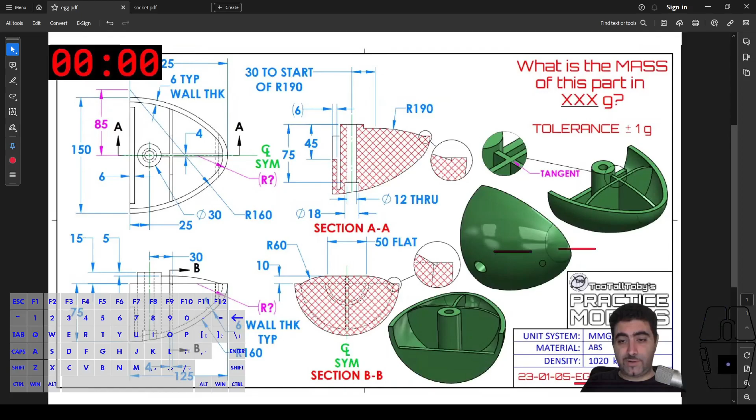And if you look closely, you will see that this rendering of a window or whatever that is doesn't distort over that edge line. Now that instinctively tells me that these two arcs should be tangent, right? Although this is not mentioned anywhere in the drawing, at least the way I see it's not. So let's see how we can approach that.

Okay, so we'll fire up Alibre. We will make a new part. We'll call it egg because we can. And let's start designing. So let me show you first how I will start.

I will start with this view here, which is a 75 line here and a 125 line here. And then I need to make this first arc. Now this first arc, we've got its radius, it's right here. It's 160 millimeters. The second one, we don't have its radius, but we know a couple of things.

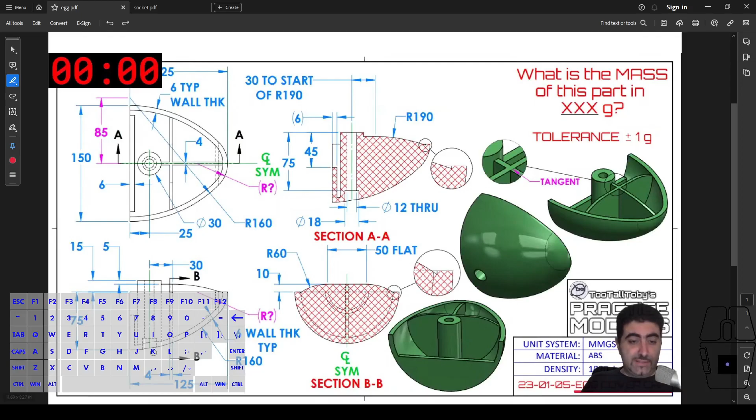We know that it's tangent to the first one, and we know the center of that arc is exactly on that line, right? So that'll help. But in order to fully define this arc as well, we also need the center of this arc. Well, if you look really closely here, it seems that this arc ends perpendicularly to the front face.

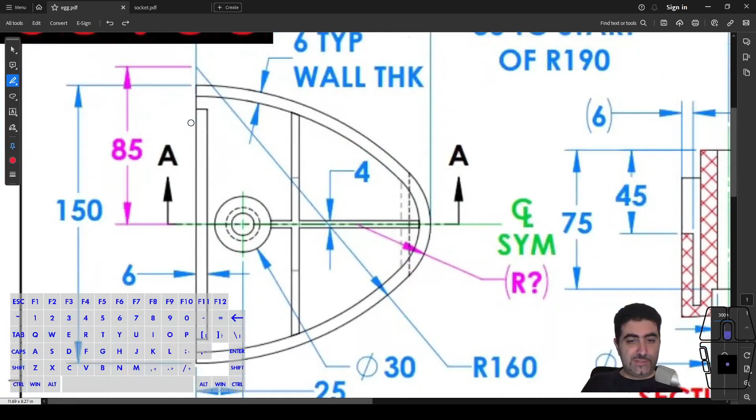And indeed, if you also check this one out, you will see that we get confirmation that the center of this arc is indeed on the plane of that front face, right? And you can also see that the egg portion of it, without the pillar and the ribs, is a revolved feature, revolved and shelled.

How can you tell it's shelled? Well, we get a 6 millimeter typical wall thickness here. That generally means it's shelled. So let's go and apply all of that. We will start the arc. We know that it's 160 millimeters. Okay, there's the center of the arc.

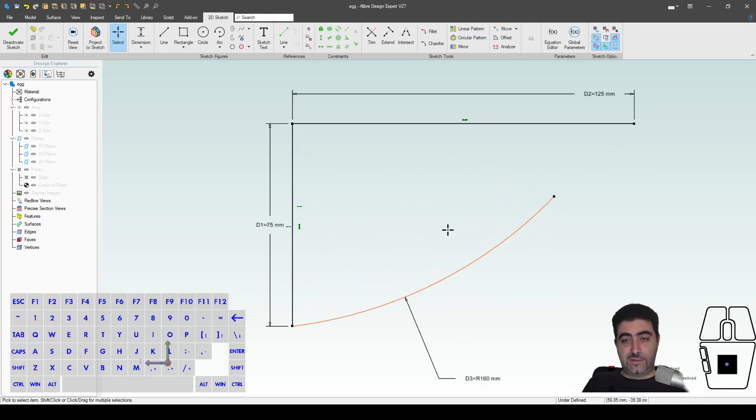We can either constrain it with a coincidence constraint to be on that line so that it ends up being on the front face, or, you know, I might have been designing like this and I couldn't see that center. So in Alibre, you can make an arc perpendicular to a line. And what that does is exactly the same thing. It puts the center of the arc on that line.

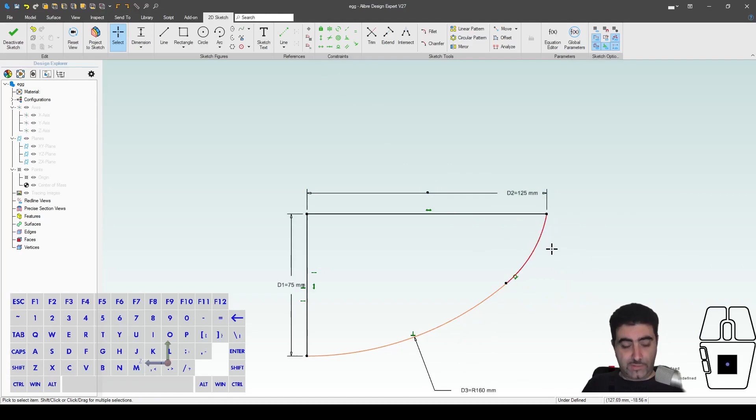So we've done that. Now let's create the tangent arc, put it all the way up there, okay? And we constrain it to be on that top line, and what do you know, this is fully constrained. Okay, now we will hit the space bar and we'll do a revolution. Oh, I get a problem detected.

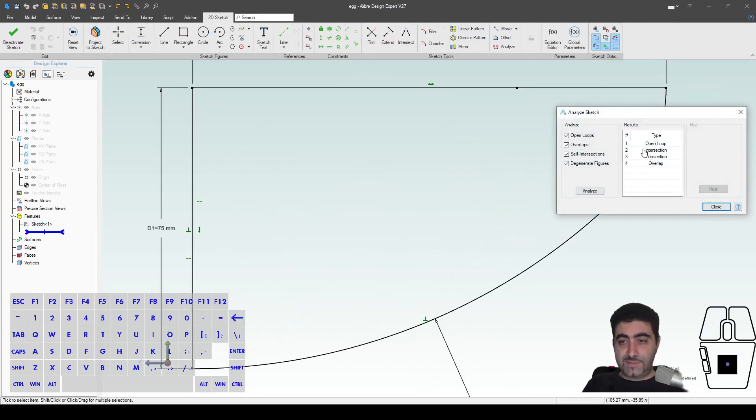What problem do I get? It seems that I might have made this line twice. Yes, I actually did this front line twice somehow. In any case, now I start the revolution, but which axis am I going to use? Well, of course I can use the z-axis, because of the way I drew the sketch.

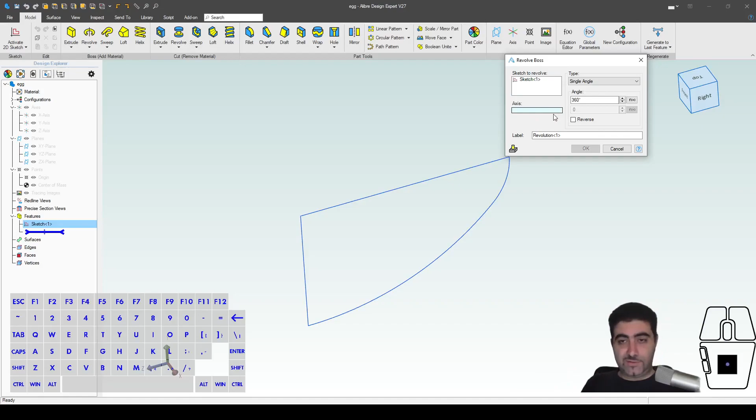But look, I have my sketches toggled on up here. It's this little button, right? So when I have my sketches toggled on in Alibre, I get additional options available to me, which I didn't even know until recently. One of them is I can use one of the lines without any other treatment or preparation as a revolution axis. Okay, so let's say that this is mid-plane 180 degrees, and we have the exact shape that we want.

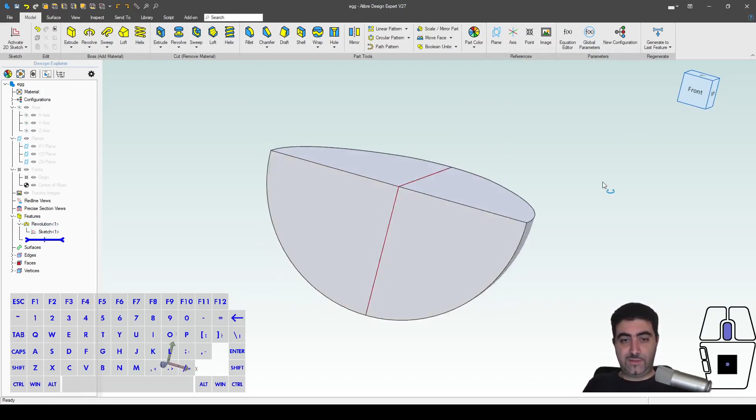Now I'm gonna shell, and the wall thickness is 6 millimeters, and you will notice that I'm also removing this surface here. Okay, now why am I removing this front surface? You will see that in a bit. Okay, so what feature do we design next?

Well, next I will do this pillar here. Why? Well, I have these dimensions here, and they're measured off the top of this pillar, plus the ribs also reference the pillar.

So generally speaking, it's better if you do this first. You can do the math and extract the correct values, but there's no point. If you have direct values annotated here, just use them.

Oh, and how do we create the pillar? Well, it's 15 millimeters over this top plane, and it goes all the way down to this circular bottom. So let's do that thing exactly.

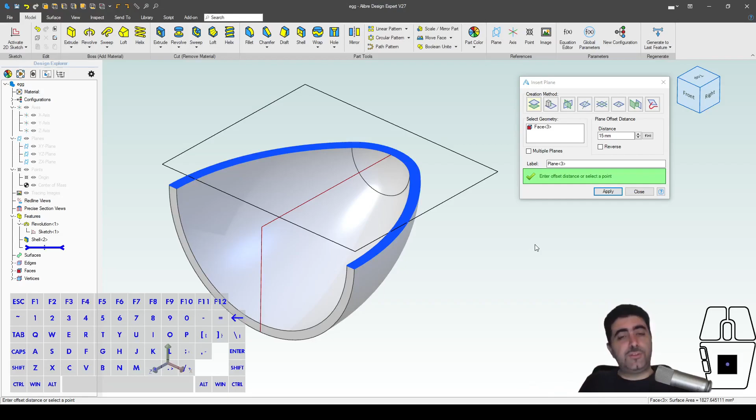Now I will create a reference plane. Top tip: when you're creating reference geometry, do not select the creation method first on your own. Do not do that, because 99% of the time Alibre is automatically going to select the correct one. Only if it doesn't, which is unlikely, should you choose it by yourself. I say never do that. It just costs you a bit of time. If you want to save time, don't do that.

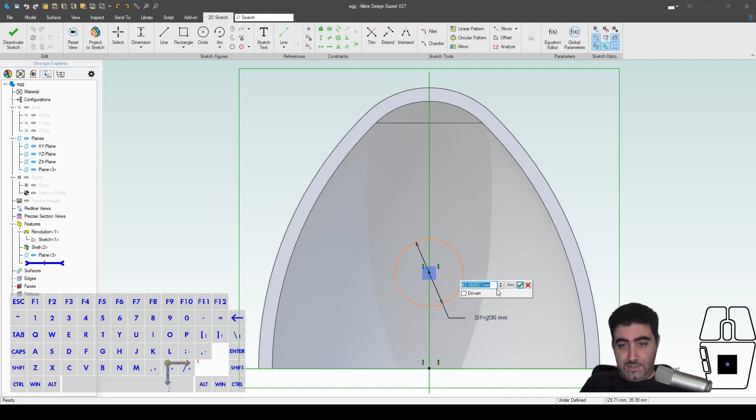By the way, let me show my planes as well. Okay, so this is the one that we just created, and we're going to create this pillar, which is 30 millimeters. It's in the middle, and it's 25 millimeters from this origin. Yep, I know, we need to go the other way.

Extrude up to next surface, give it the correct direction, and we're done. And since I did that, I might as well do that hole that goes through it.

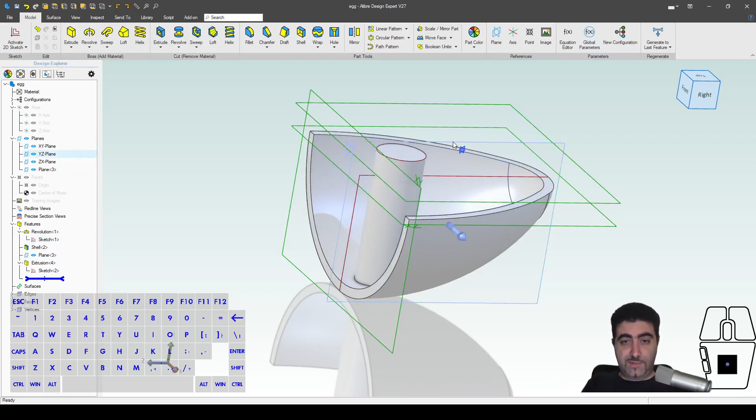So I just project in the top surface, and I pencil in the rough shape. Now, if I desperately wanted to have this fully defined, I would also add this horizontal constraint, which, because this is an arc, makes sure that I'm still cutting well below the bottom surface. In case I didn't make it clear, I'm going for this internal cut right here, which ends up down here.

Yep, so that's how I would do it. Now, the dimensions for this are annotated here. 75 millimeters from the top of this pillar is where this counter bore starts. And the through hole is a diameter of 12, and the counter bore is a diameter of 18.

Okay, let's go apply all of that. So the drawing tells me that this is 75. I need 12 here as a diameter, so 6 is a radius, and 18 as a diameter means that I need 9 millimeters of radius.

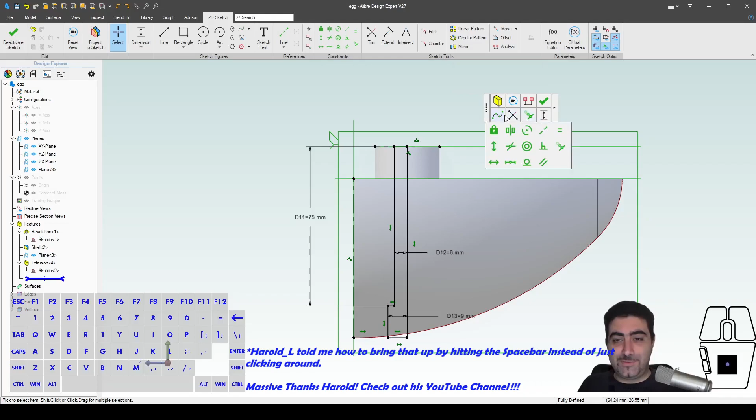And again, I'm just going to call it the Harold bar, because the Harold menu—this context menu, I'm just going to call it the Harold menu because he showed us how to do it, how to bring it up by just hitting the space bar. And you can do all sorts of stuff. Look at that. This is so good that it's amazing. Anyway,

So yeah, now I want a full cut, full 360 degree, and there we go. Now, if I take a look here, this is done. It's starting to take shape already. And I'll do the front face.

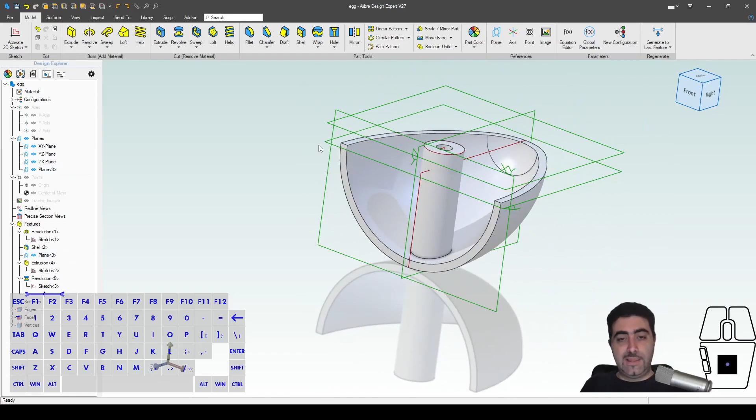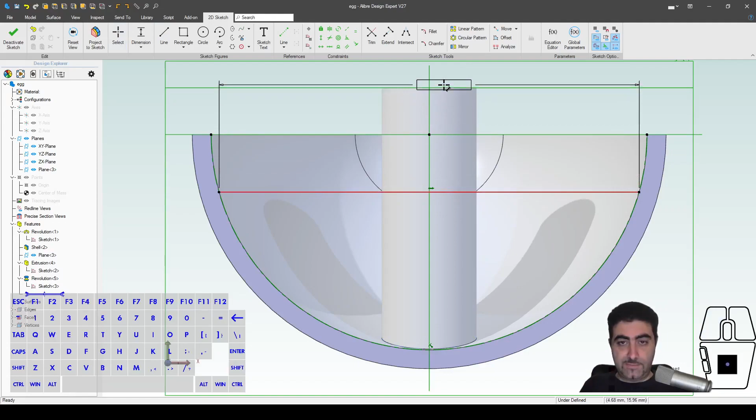Okay, I'm just going to sketch here on the front face. I need to project this in. Okay, and I know that this line needs to be... sorry, this line needs to be at the height. You know, my mouse doesn't want to work these days, I don't know what's going on.

But anyway, this needs to be at a 45 millimeter height difference from the top of that pillar. So I do that, and then I just close the sketch with a center arc, and that's it.

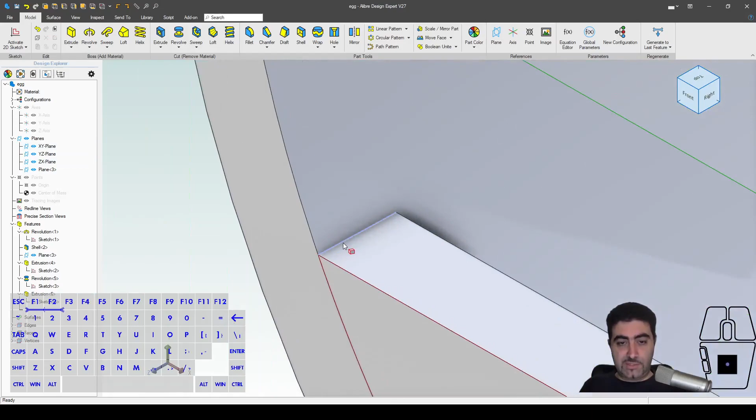This is 6 millimeters thick, and look at this. I just extruded into the part. Going into the part. And as I hit OK, it will merge in such a way that this is not a straight line actually, it follows this surface, which is a compound surface because it's created by two different radii.

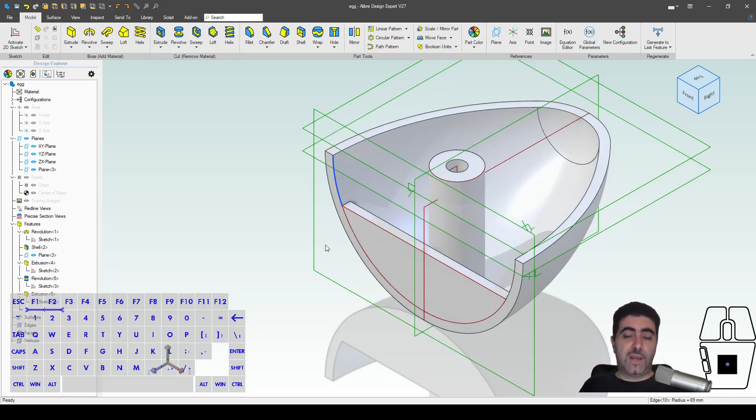One is this offset 160 millimeter radii, and the other one is this 75 millimeter radius around which I revolved. So this now, as I push it and extrude it into the material, it creates this edge which follows the compound surface perfectly. If I had not shelled and removed this front face and did this opening by a cut, I would have gotten a straight line here, and this would have been wrong.

Funnily enough, I did try it, and the mass is still within tolerance. So in the context of Too Tall Toby's competition, this could have worked, but this is the correct way to do it. So now we're going to tackle this rib here.

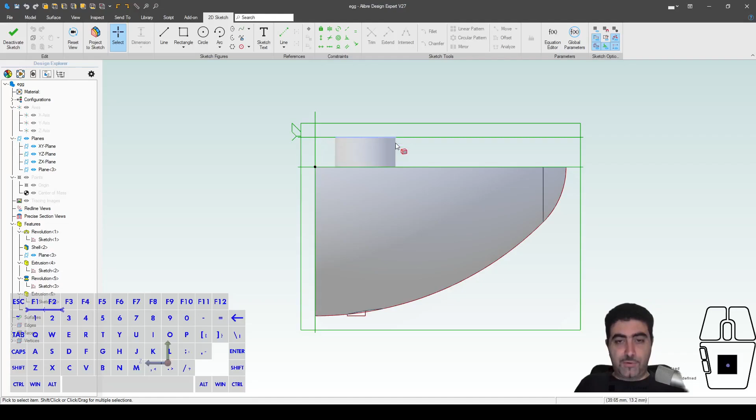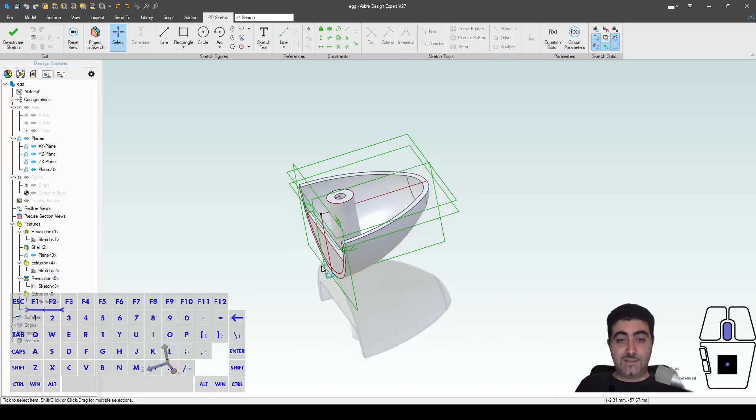Okay, now how are you going to get a closed sketch? You saw I'm drawing on the YZ plane, so I'll sketch it and then extrude it mid-plane. But how are you going to get a closed sketch? You need to project the section of this surface to the sketch plane, and you can't do that in Alibre, right? Well, you can. You can do pretty much anything in Alibre.

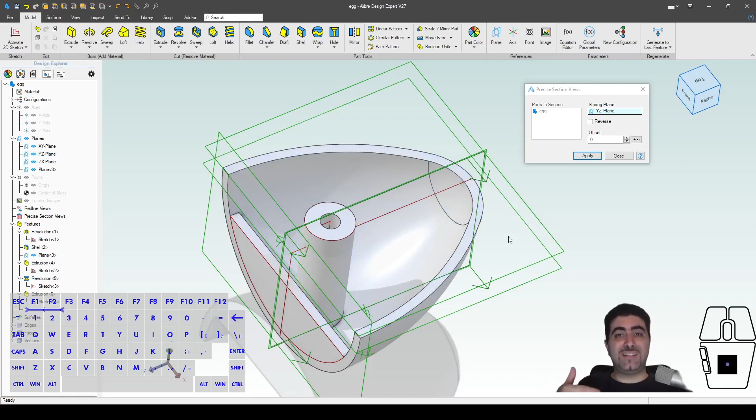So what you do is a precise section view. For the slicing plane, you select the plane that you're going to sketch on, and these arrows come up. These arrows show you the side of the material that is going to be left after the section.

After you do this precise section view, you start sketching. And before you do anything else, you can select the cut faces for projection, which is amazing, actually. But the problem is you cannot maintain associativity to a face created by a precise section view. So you bring it in, but then you need to lock everything manually by hand. That's the problem there.

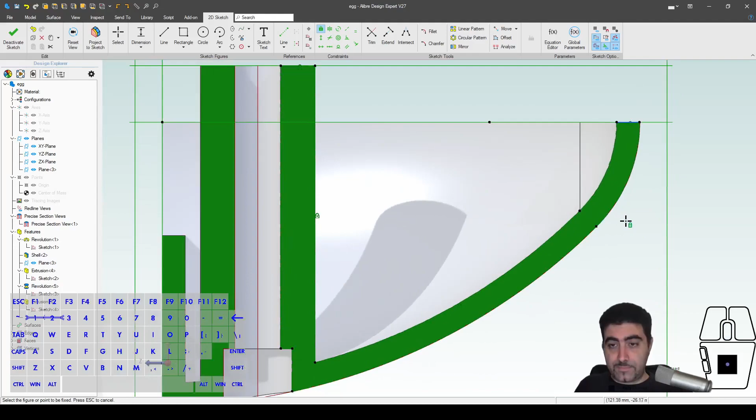Okay, let's lock everything that we're going to use, at least. I think we are good to go. Sometimes, especially with arcs, you also need to lock the endpoints, but we'll see how that goes. So I have this projected in now, which is the section view of a surface to my sketch plane. I have a projection for that.

Now I can start drawing. So a bit of a straight line and then a tangent arc, which I'll just click here so that I make coincident, but nothing else. And let's start now putting dimensions in.

So we know that this arc is 190 millimeters in radius, and I also know that the straight part of this rib ends 30 millimeters from the center axis of that pillar. What else do we have? We also have this dimension here, the 5 millimeters, that tells us this rib starts 5 millimeters below the top surface of this pillar. Okay, so let's go plug all of that in.

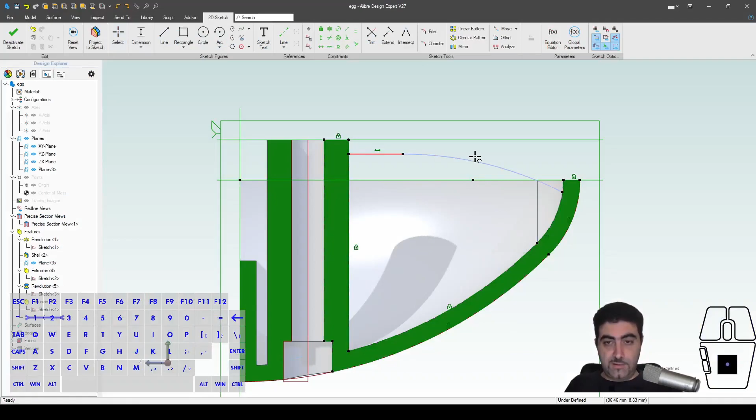So this is 190 millimeters. Oh, I hadn't made that tangent for some reason. My mouse doesn't want to cooperate with me today.

So this is 5 millimeters from the top of that surface. And I need 30 millimeters to the axis of this pillar, but look, I can dimension to it. Now here's another really cool bit of trivia about Alibre, which I didn't know up until a couple of weeks ago. When you have your sketches showing, I never had my sketches showing.

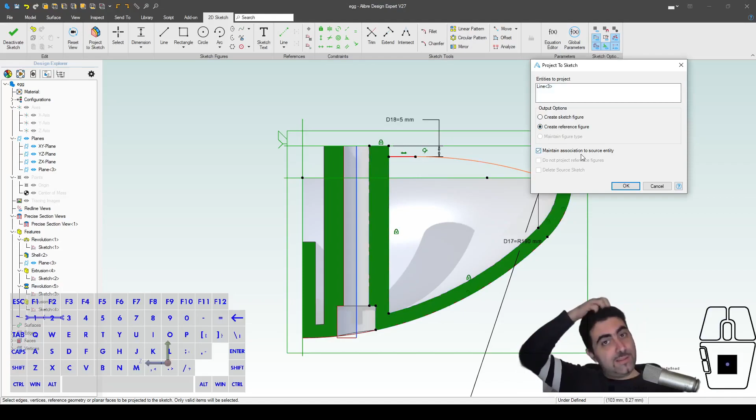I didn't like the visual impact of it, but when you have your sketches showing, you can do this: open this project to sketch, clicking here or shortcut, and then you can select a single sketch entity from a previous sketch and bring it in. A single sketch entity or a few of them, and you can create them and bring them into a newer sketch. So this is what I'm going to do. I'm going to create a reference figure maintaining an association to it.

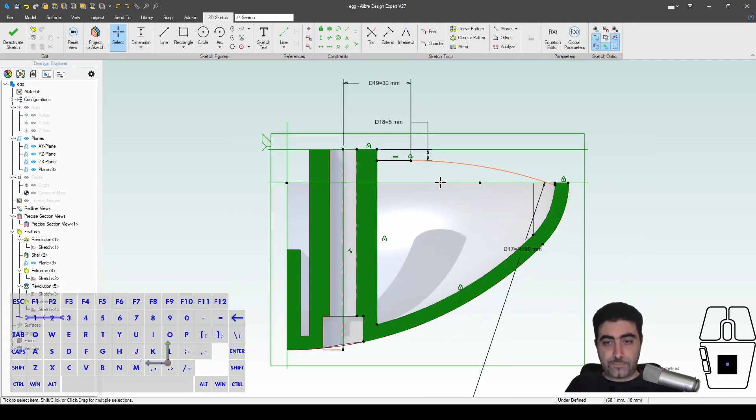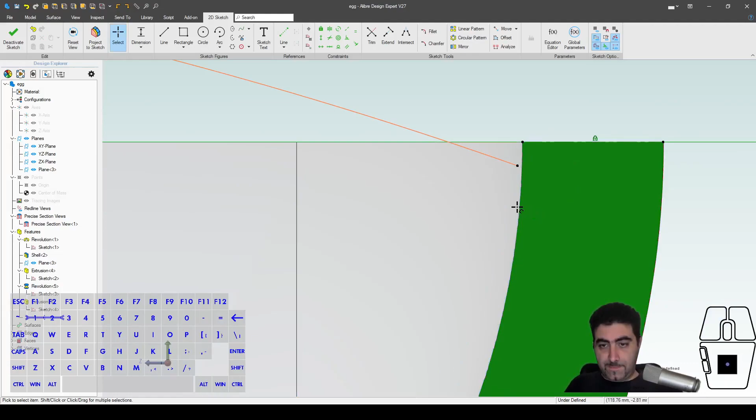And 30 millimeters, okay, so that's good. And what else do I... right, yeah, you see now, this is moving. Right, that's why it doesn't... okay, let me... There you go, now it's fully defined.

So when you're projecting stuff and you're not maintaining association to it, it's better to select edges instead of faces to project. Anyway, so I did the hard part. Now I need to trace it around.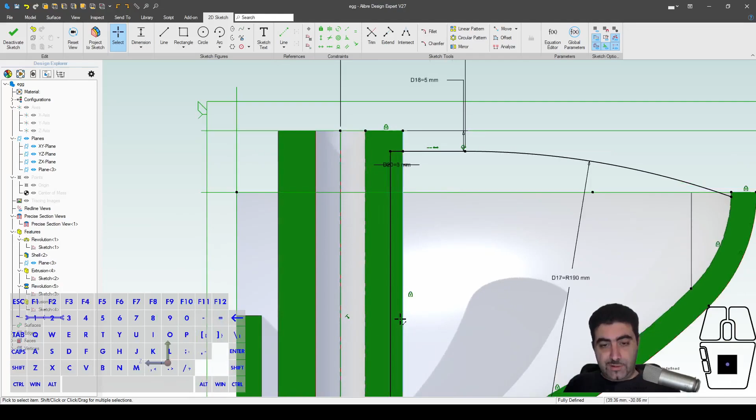But remember, this is a rib, okay, so this is a standard tip. Every time you create a rib, especially if you're going to mid-plane extrude it, you always want to design it going into the material. Because imagine if we left it, if we closed the sketch like that, as soon as we extrude mid-plane, we will create a face that is tangent to that cylinder, and it doesn't connect to it. Now you'll see that the way we'll do it, it will hug the outer surface of this cylinder.

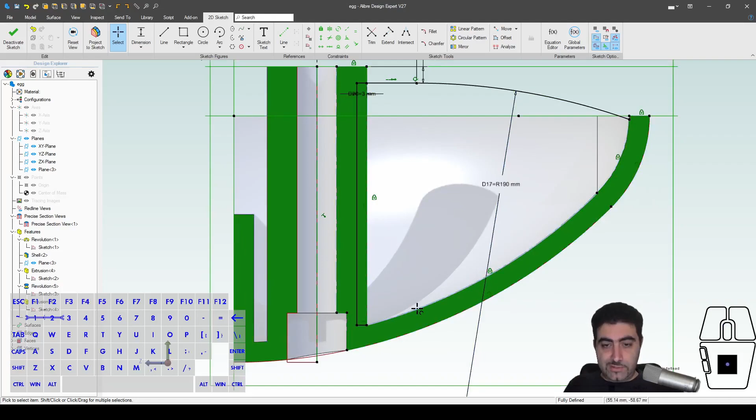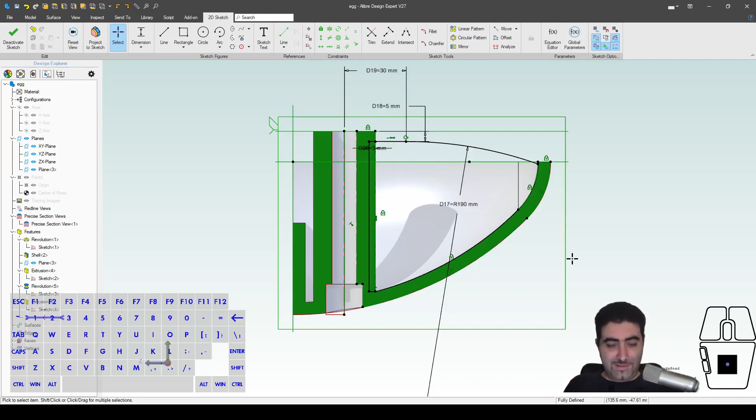Okay, so let's close this sketch. This arc, I can make this into a geometry entity because I need all of it, but I need to create a new center arc here, because I don't need all of that—just up to this point. So now actually I've got an airtight sketch and it's based on the section of a surface to a sketch plane, and that's amazing, to me at least. It's a really powerful tool.

Okay, so I did that. It's not associative, so I don't need that view anymore. Let's go make the other rib as well. Now, here's a huge trap for the other rib. We know, the way it's annotated, that rib ends 30 millimeters from the center axis of that pillar. In other words, this rib, the end of that rib, lives at the precise point where the other one starts curving down.

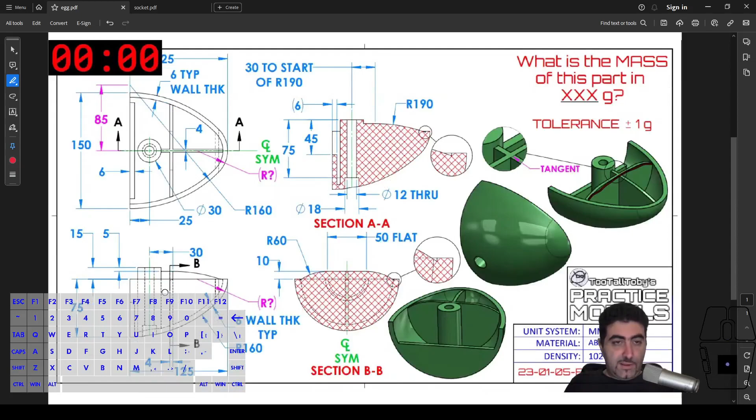Okay, but if we look at it at this view, if we create the sketch here and extrude this way, what we're going to end up with is an extrusion that is going to be like this.

Okay, you see this? The extrusion is going to be flying off this sidewall, right? We don't want that. So what we need to do is sketch on the inside side of that rib, and then extrude into the material.

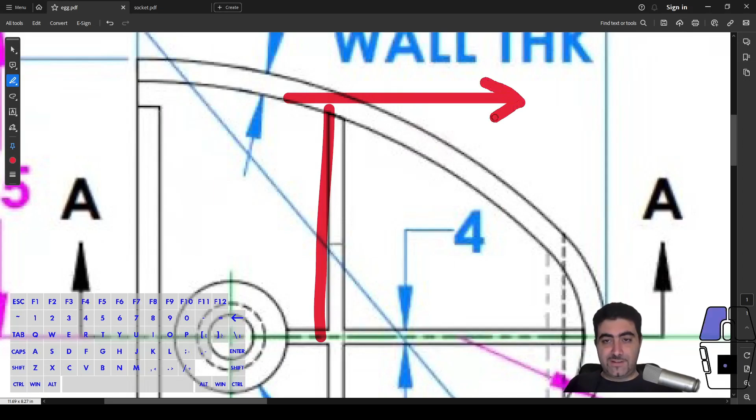Plus, I also see here that the ribs are 4 millimeters thick. Let's go back and check that we've actually made it 4 - and it's 6. There you go, got that error.

Okay, so back to that rib. It ends 30 millimeters from the center of this pillar. That pillar lives 25 millimeters from the front face. That means the rib ends at 55 millimeters from the front face.

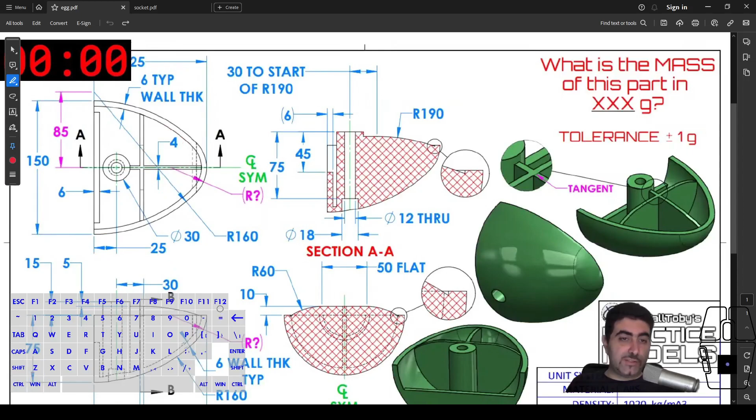That's where it ends, but I need to know where it starts. Well, I know it's 4 millimeters thick, so it starts 51 millimeters from the front face. So let's go do that.

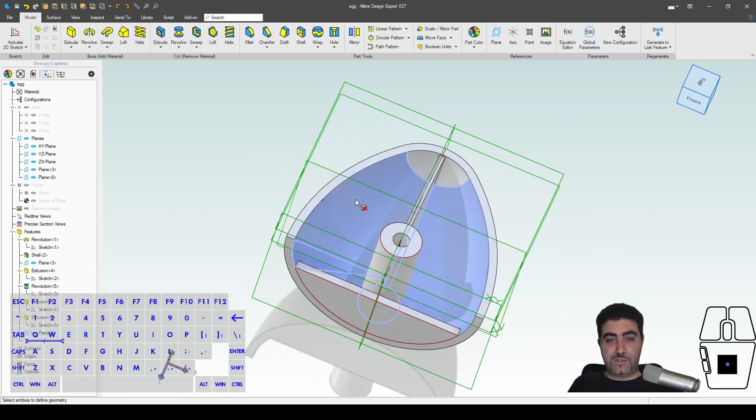51 - no, I need that in reverse. Okay, so that's where I'm going to sketch, but again, I need the section. I need to project pieces of the section of this compound surface to the sketch plane. So how do we do that?

Well, we create a precise view. I want this piece to remain, and we're good to go. Now I will sketch here. This time, the only thing I need to project is this arc, because this is symmetrical on either side. You'll see how I'll make that.

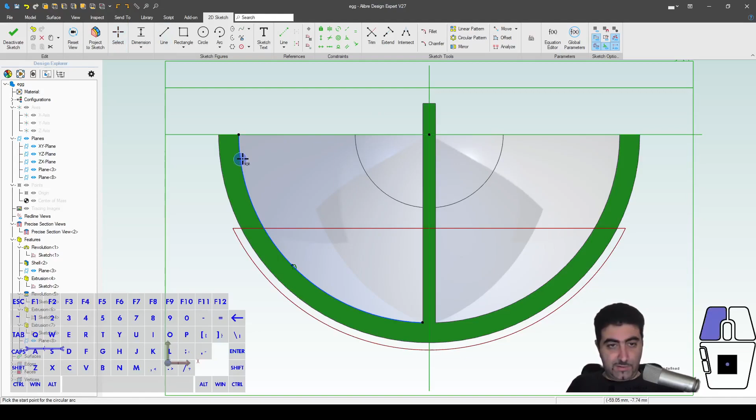So I didn't show you guys the dimensions. Let's get the rough shape penciled in, and I'll show you the dimensions afterwards. So this is tangent to that. Okay.

Section BB is this one, right? Let's see - it tells us that first of all it's symmetric. This is 60 millimeters, so that means this is 60 millimeters as well. 50 millimeter flat, and 10 millimeters from this top face - but we already knew that because we know this is tangent to the other rib there, so I'm not even going to use that.

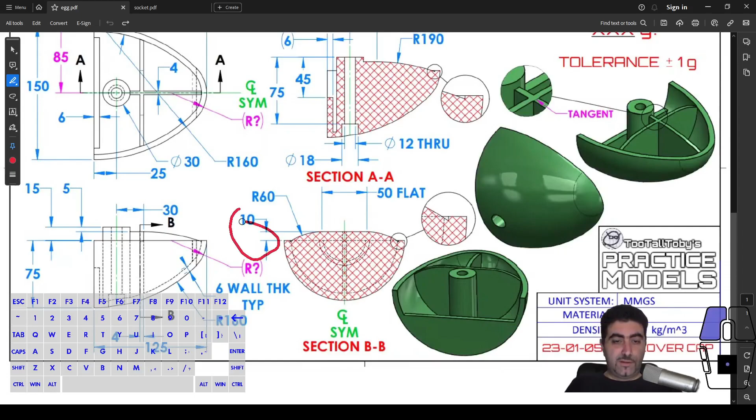What I'm going to do is project in this edge, lock it again, and let's start putting the dimensions in. So this is 60, this is symmetric, which means it's equal. And let's make these two horizontal.

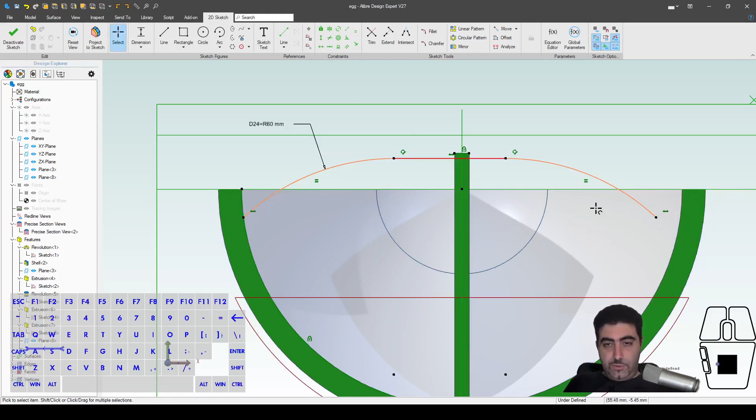This will be enough, you'll see why. Because we know that this linear segment needs to be symmetric around this point, so I will use my midpoint constraint with 3 points. This now constrains this point to be on the perpendicular bisector of this line segment.

Okay, so let's give this a length of 50, and let's say that this is collinear to here - and look at that, right? Fully defined. So now I just need to close the sketch with a center arc from this point to this point, and I'm ready to extrude.

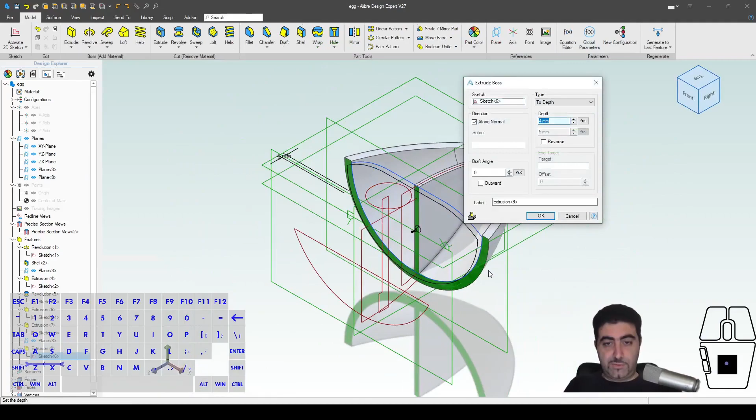I'm going to extrude into my material for 4 millimeters. I don't even need to have this anymore. And my part is done, guys. That's it. Let me turn off my planes and my sketches so we can get the pure shape going here.

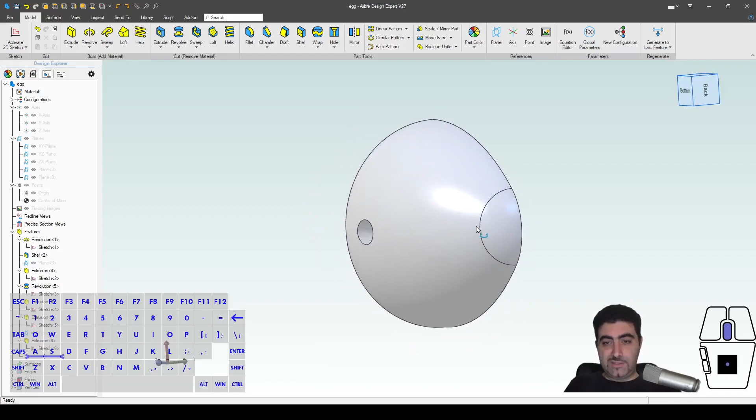Look, you see this rendered light, how it doesn't distort around that edge. So we got that as well. I don't know if you can make it out on your screen in YouTube, but there's a second blue light that doesn't distort over that edge either.

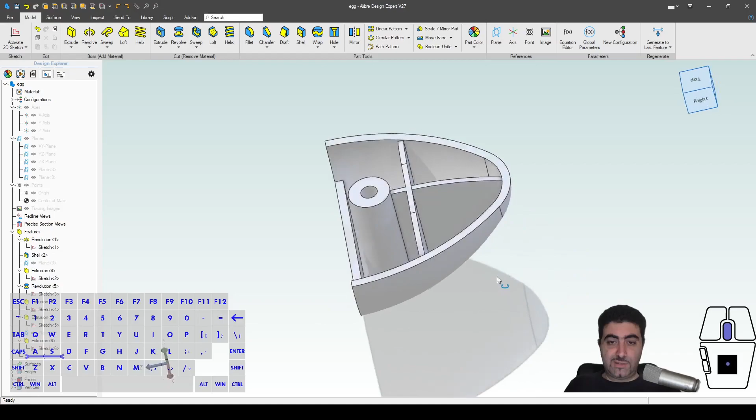So we have that - we've got the ribs being tangent. Everything looks great. So this should be 251 grams as per the legend. Before we can get an answer though, we need to give it a material. This is supposed to be made out of ABS.

If you don't give it a material, you'll get back a ridiculous number. And there you go - actually this is 0.2511 kilograms, that's 251.1 grams. This had a tolerance of plus or minus 1 gram, so we're bang on essentially.

And this is correct. So that's how you do this, right? A lot of traps in this one drawing. This in a speed modeling situation would have been a hard one, I think is the technical term.

Okay, so let's go to the second one. This practice model - TooTallToby released a video doing this model in Onshape - and I would handle the symmetry in this model slightly differently. Okay, so you have symmetry here and you have symmetry here. So it's a highly symmetrical model. Other than that, it's a pretty simple one, so it's a good example, I think.

You have this cam lobe shape, I'm going to call it. It just has a hole in it. You cut a bit of a slant to the outer faces. Then you have this reinforcing rib here with a couple of cutouts, and that's it basically. Oh, plus you have these things here.

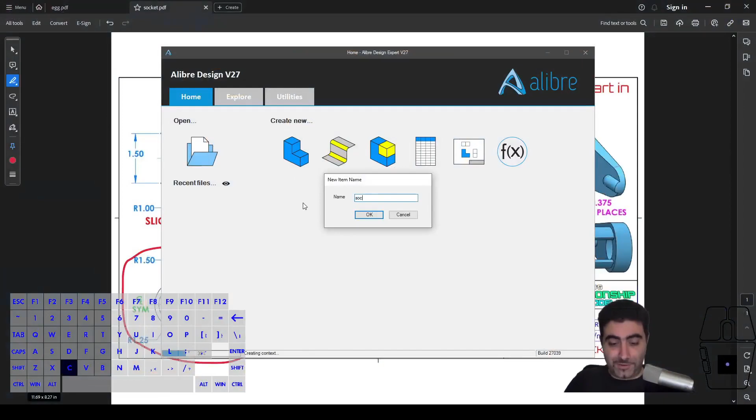Generally it's important - as I say, this is in an IPS system, so inches, pounds for mass, and seconds. And it's a steel part. So let's go do all of that.

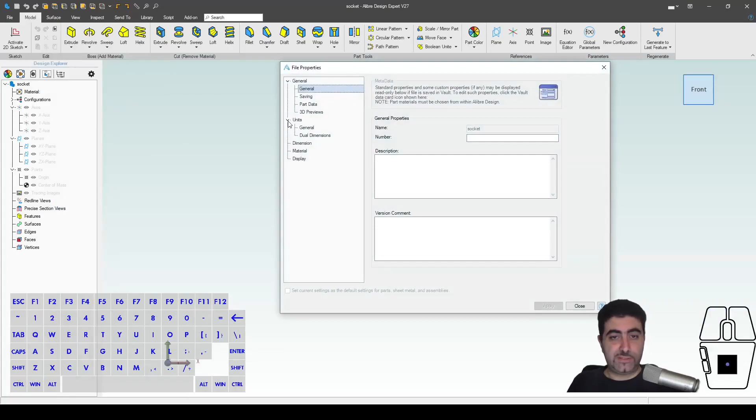For the speed modeling competition, I have a template ready made like that. But if you want to change it in a file, you go to Properties, Units - change the units, change the mass, and hit apply.

So let's start drawing. I will start drawing in the YZ plane. To me it doesn't matter where you start drawing, unless you need a very specific orientation in space, which you don't really - I don't in this part.

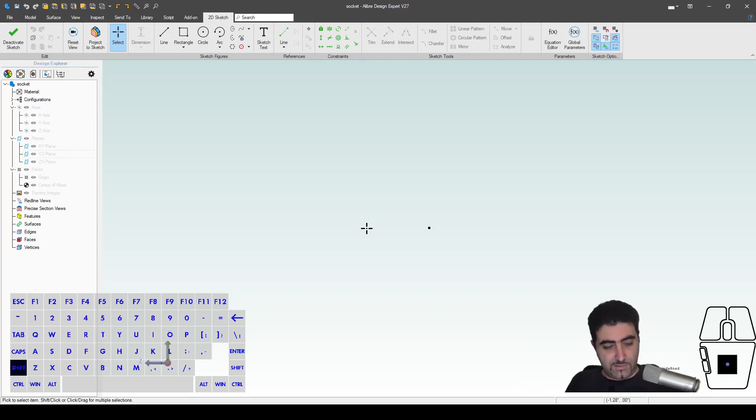Let's say that this is 1.5 radius, okay. This is a 1-inch radius, and let's connect it with lines.

Now I want to make the center points horizontal to the origin of my sketch. I also want to make them symmetric about my origin using the midpoint constraint with 3 points. Then I need to make everything tangent here.

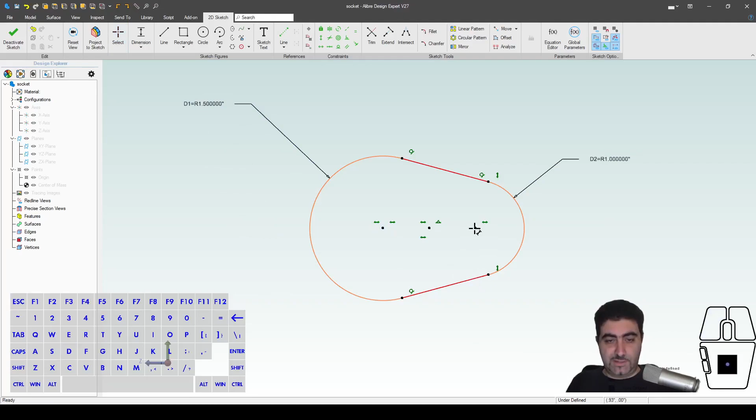So I've got my cam lobe shape, and I also need a 1.5 inch hole in it. So what am I going to do with this now? Am I going to extrude it in an offset manner? Or do I need to create another plane?

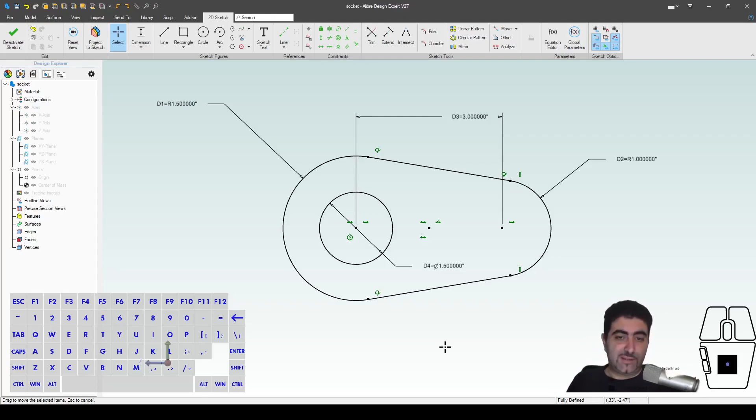Alibre doesn't currently have offset extrude. No, what I'm going to do is mid-plane extrude it for 7 inches - that's it. So that's how I'm going to handle that. This will not be mirrored; this feature does not need to be mirrored.

By the way, let's go to view - I need to have my sketches toggled on and my planes. Okay, so I'm going to sketch on the YZ plane again. I'm going to project everything in and then turn this back into a reference geometry.

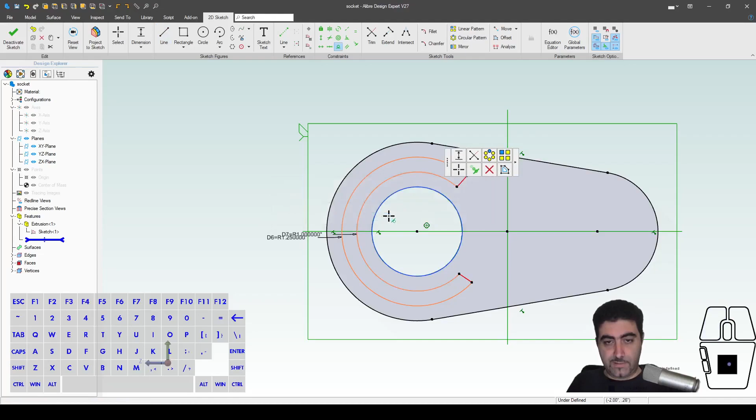Now I'm going to start making my center arcs. Let's get another one going. One. Now I'm going to plug the ends and apply a perpendicular constraint, line to arc. It seems this is a pretty unique thing to Alibre.

I want to make these points - my mouse is not working very well. I seem to be having a bit of trouble here for some reason with the vertical constraint. But I can always make a line here and call that vertical, right?

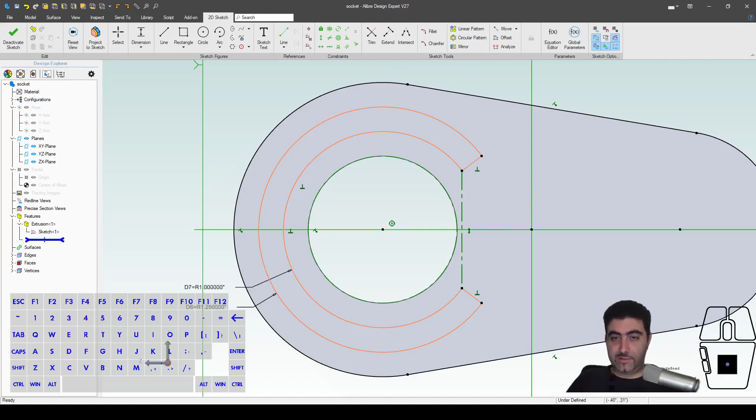In any case, we know that this has 130 degrees here. So I've got this fully defined now, and I also have the outer shape as a geometry entity.

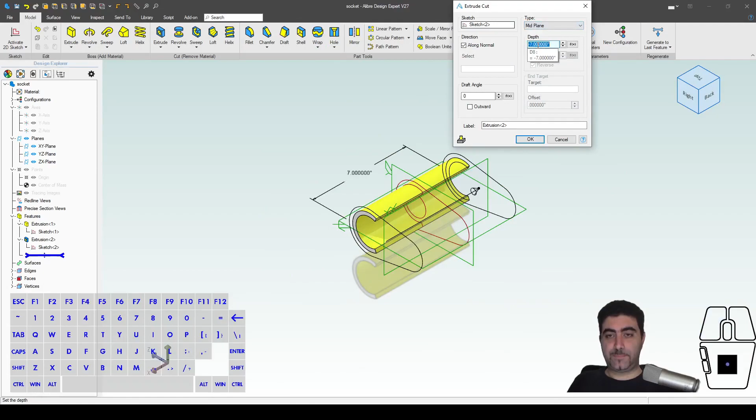Projected in as geometry. So if I do an extrude cut mid-plane, I don't want the full 7 inches. How much do I want? Let's check the drawing - I need the cut to stop 1 inch before the end, either side. So 2 inches total, and I need 5 inches of cut.

Look, it's starting to take shape. So up to extrusion 2, I wouldn't mirror anything - it'll be like that, I just leave it like that.

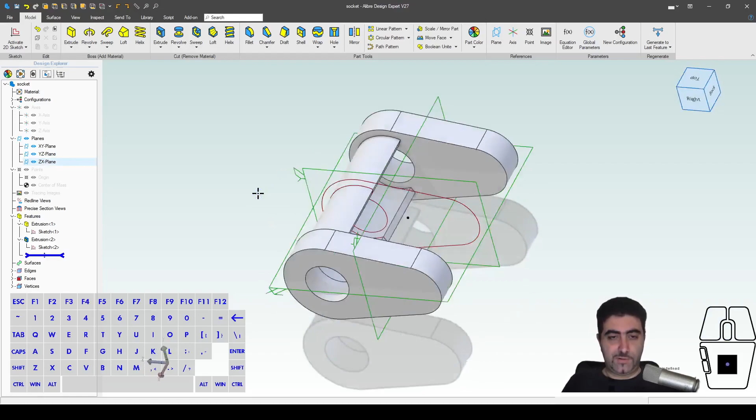We'll start working on one side and then mirror everything at the end. So go to the ZX plane, right? I'm going to project this in as a reference.

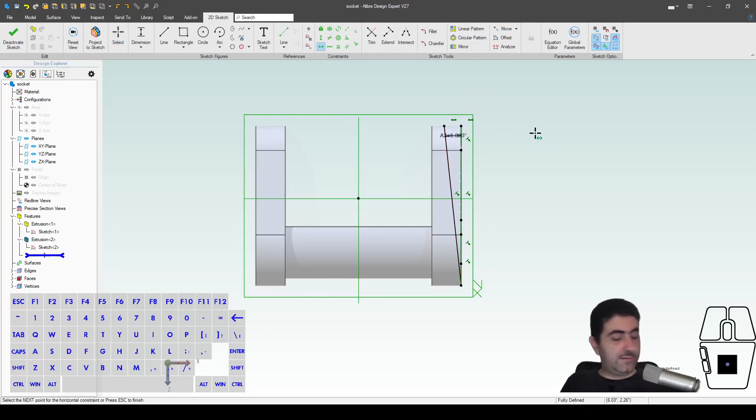I'm going to make a slant line. Let's put the 6 degrees in, and single line, right? So I exit the sketch, I ignore this warning, thin extrude through all. I just need a large enough number to take everything off the side. I'm good to go. Okay.

Now I need to make the opening in this rib. Well, I'll design on this surface. I'll just bring the entire surface in because that's easier than playing with selection. So how would I do it now? I'll just make the two lines here. Okay. Then I'll make the lines perpendicular to the arcs. Okay. I will make these vertical.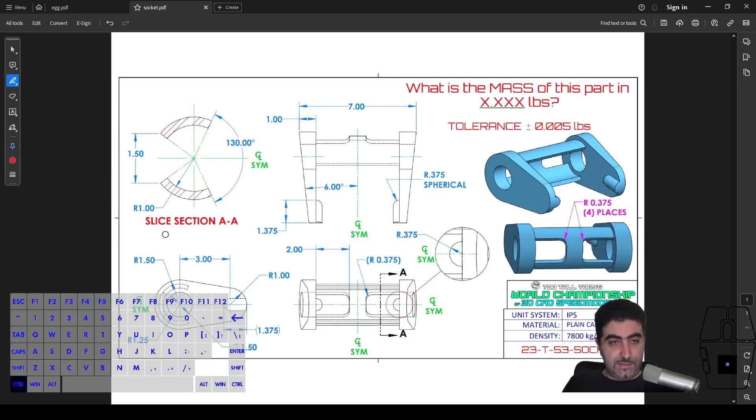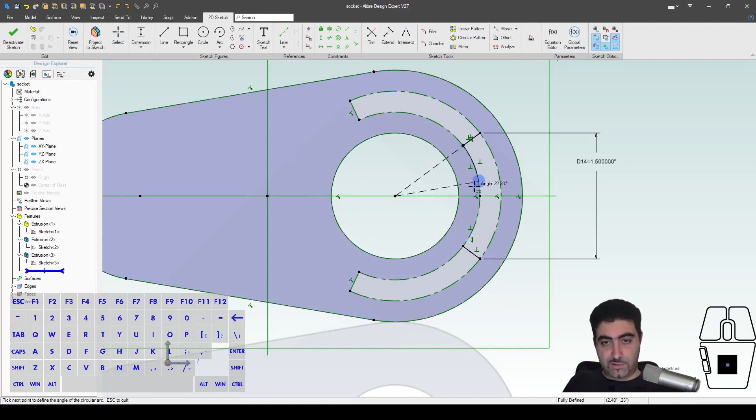I will give the 1.5 inches dimension here. Where does that come from? It comes from this section view here. And you need to pay attention because the 1.5 inches is measured off of the outer points, not the inner ones, right? That would give you a different angle here. And now that I have that fully defined, I just close the sketch with the appropriate center arcs and extrude cut for 2 inches.

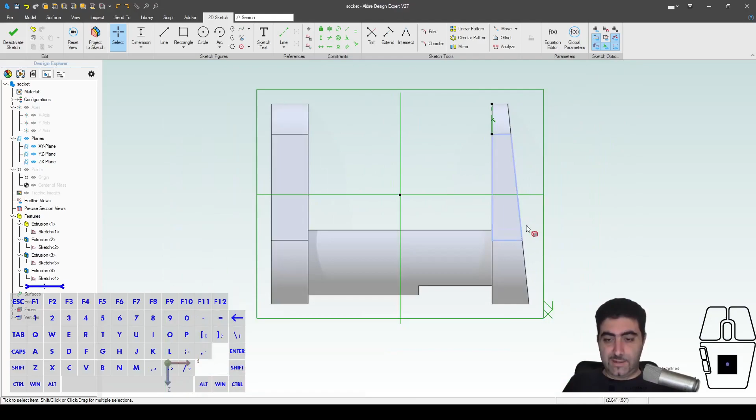There you go. And I will now make this little nub or tab or whatever here. So again, I will draw on the XZ plane, ZX plane, whatever. I will project this in, and let's take a look at the drawing. This is what I'm doing now. Okay. It goes on for 1.375.

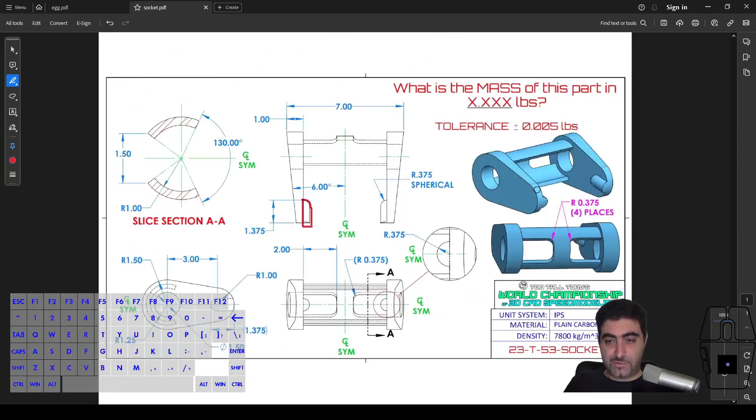Then you have an arc here. Okay. Then that arc is clearly tangent. Well, it's clearly tangent to that front. Why Adobe? Why? It's clearly tangent to that other line. And then the front just follows this curvature, right? You can also see it very clearly here. And that back radius is R.375. So let's go do all that now.

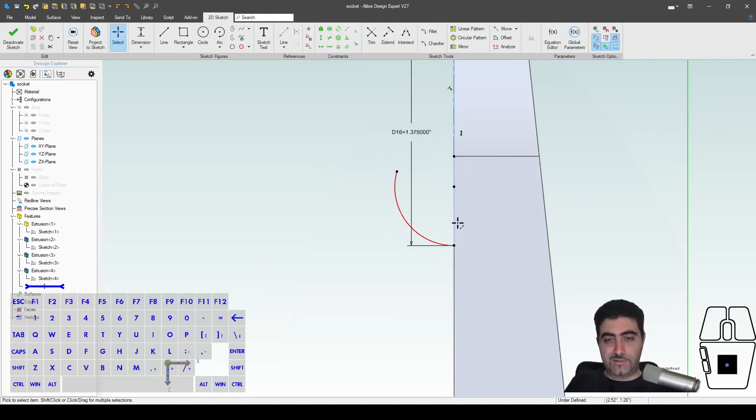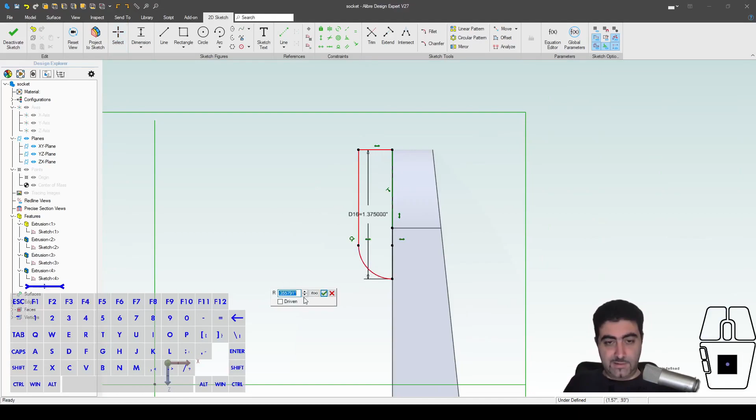So I'm just going to make a line, 1.375. There you go. And I'll make my arc. Okay. Now, that arc starts off perpendicularly to that face. That means the center is on this line. And it's tangent to the other line that goes off. And that means that the center is horizontal to the end point. Okay. Let's make this horizontal again. And let's give this the radius, which will also determine the thickness of our tab here.

The revolve menu, and I will select, let me see it a bit more clearly. I will select this line from the sketch, right, because I've got my sketches toggled on to revolve. Actually, I could do it like, yeah. You can either say that this will be 180 degrees as a midplane, or you can just leave it as is and do the full revolve. You can still leave it like that. But this doesn't follow this face.

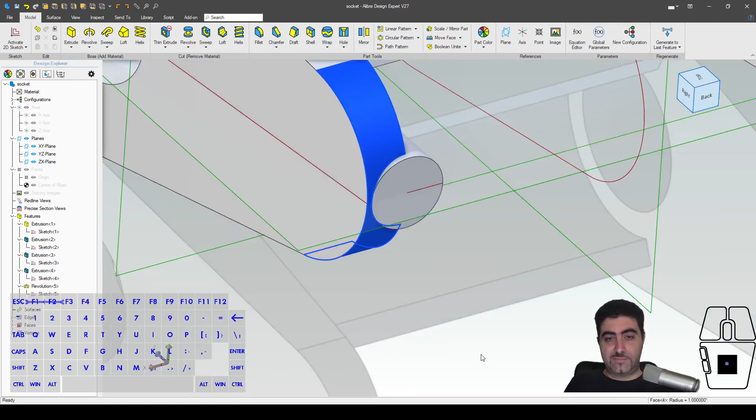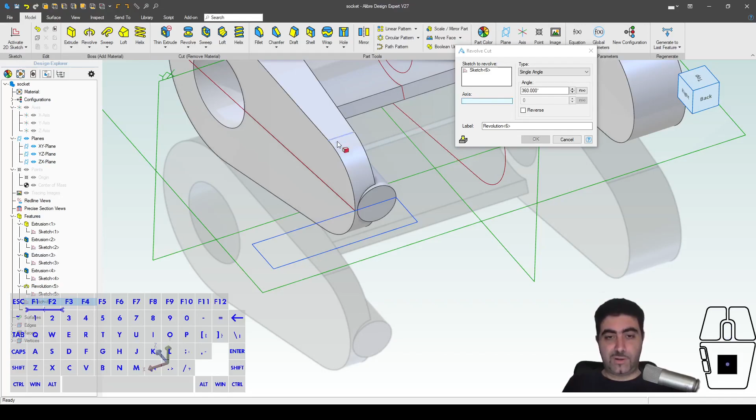Okay, so how do you do that? Well, then you do another sketch in here. You project this in. And then you draw a rectangle that's big enough. I'm not even going to dimension that. That's good enough for me. And then I'll do a revolve cut. Okay. And what's going to be the axis of my revolve cut? Well, I want it to follow along this surface. So this is going to be the axis of my cut.

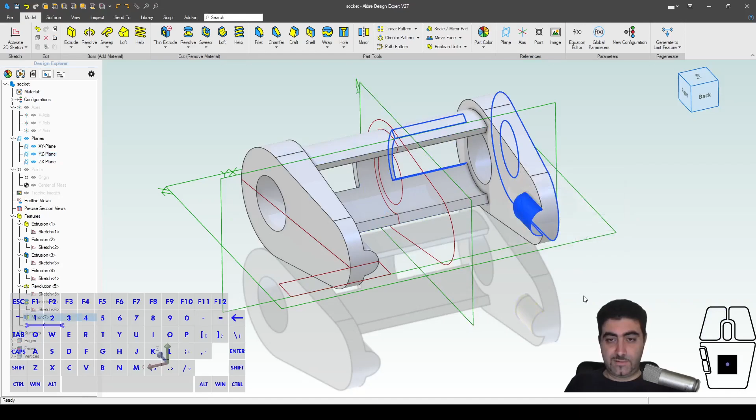I will need that to be a mid-plane cut. And I'll need that to be big enough to clear my front face, so 60 degrees should be enough. Look at that. Perfect. And so we're good to go, right? Now I'm going to mirror everything. So up to extrusion 2, I don't need a mirror, so I'm mirroring everything else. Mirror plane is this. Good. And then I'll add the fillets.

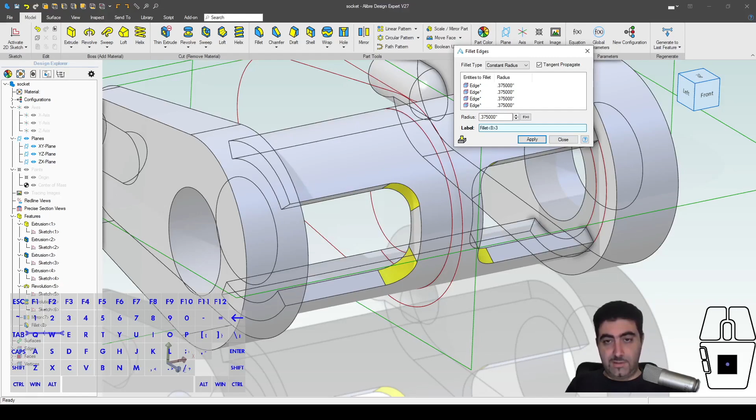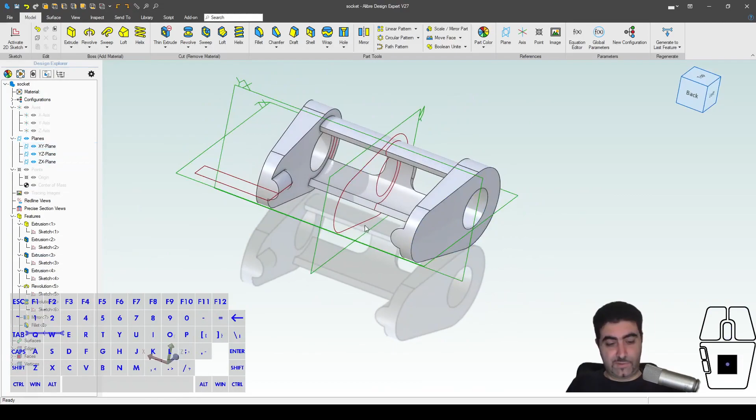And the reason I'm doing the fillets at the end is sometimes fillets don't like mirrors. Alibre seems to struggle a bit more than Fusion or SolidWorks, but there you go. And that's it. By the way, the fillet value is specified here. Okay, and that's it, guys. This is done. Let me hide my sketches and my planes so we can see the pure geometry. There you go. Nice looking part, if I may say so. But you know, Toby's practice models are always nice.

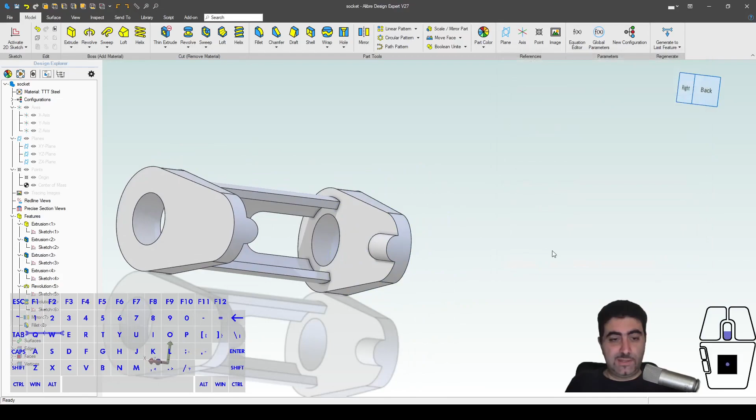Okay, cool. So let's check the mass. Before we do that, we need to assign it a material. And if we calculate it, the mass is 5.723 pounds, right? So this is the correct answer for this part, and that's how I would do it, and that's how I would handle the symmetry in this part.

Of course, in a speed modeling situation, pressure will always get to you. So in a similar part, in a speed modeling situation, I might handle the part differently, but with a clear head, I consider this to be the more efficient way to do it, right? So don't be mirroring things that you don't need to be mirroring. That's basically it.